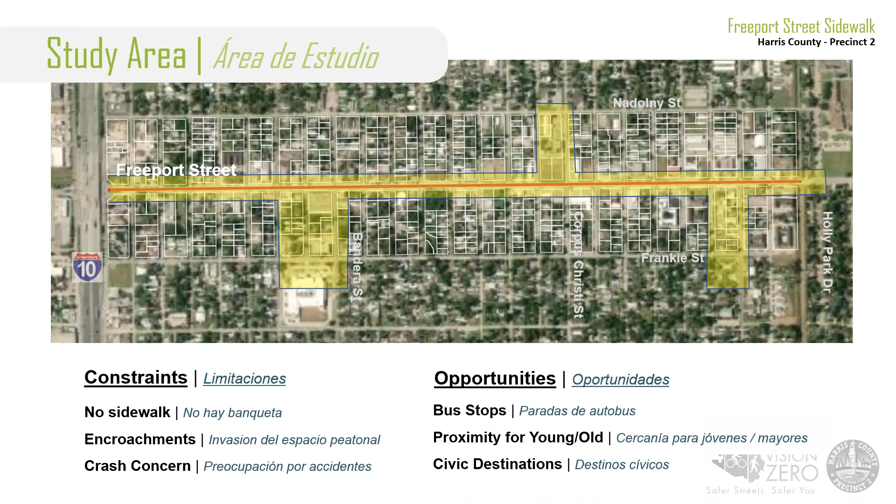First, areas with no sidewalk or incomplete sidewalks and no ramps for people with disabilities. It's first important to understand where there are currently not safe, all-weather surfaces for people to use and how we can connect spaces together to form a network. More people using the corridor and more active businesses comes from the community's success and leads to more activity. But we also need to provide the infrastructure to support that activity every day.

Here's one example of the project team walking the corridor in an example area without a sidewalk. Not only is there no sidewalk, but there is also standing water where people would be if it were dry. So even after a rain, it could be several days before someone brave enough is able to safely walk there. This is just one example, but there are many locations like it along the road, and we know residents have to deal with this every day.

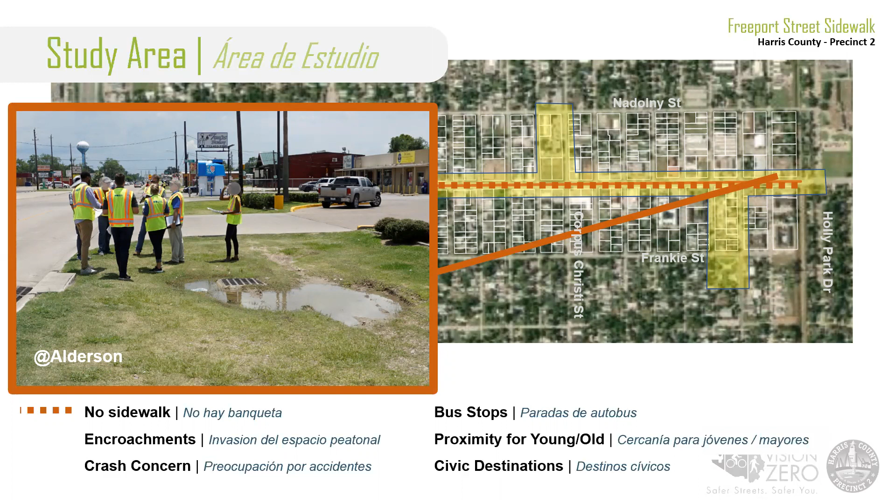We also refer to the places where grass has been worn down as people's choice trails, because that is evidence of the need for people using the corridor. We need to make sure that it is possible not just for the brave, but also for the everyday and the vulnerable users too. This is a pretty tempting place to build a sidewalk.

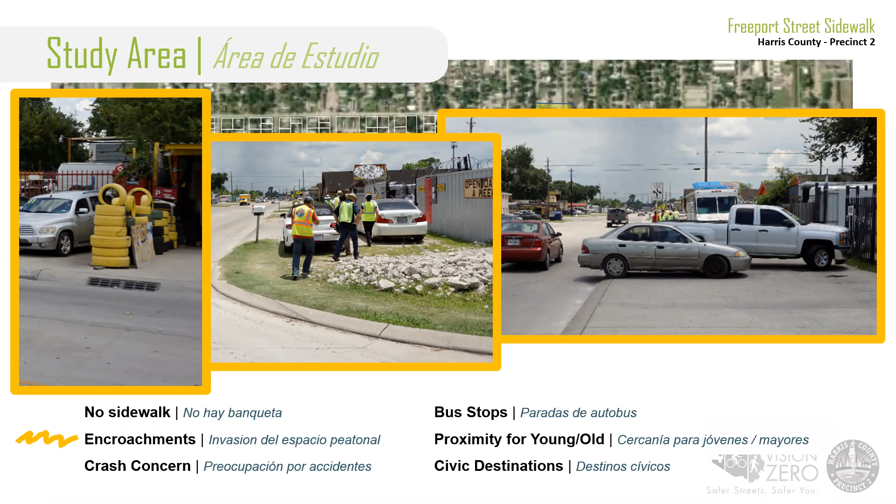I mentioned safety. This is a busy street, and unfortunately, it has also had a significant number of crashes. We pulled the data on crashes for the last 3 years and mapped it to look for patterns. We found approximately 150 crashes over the 3-year period. A number were major or ended in significant injuries, and unfortunately, 2 were fatal. It is very tragic and sad, but we can do better, so we want to learn from the experience.

Looking closer, there are a higher number of crashes and more severe crashes focused in certain areas highlighted on the screen. We are noting these as a cause for the need of improvement, and will also be looking closer at these locations for solutions. They could be adding signage, like a speed limit sign, marked crosswalks, improving visibility, and adding a safe designated space for all users.

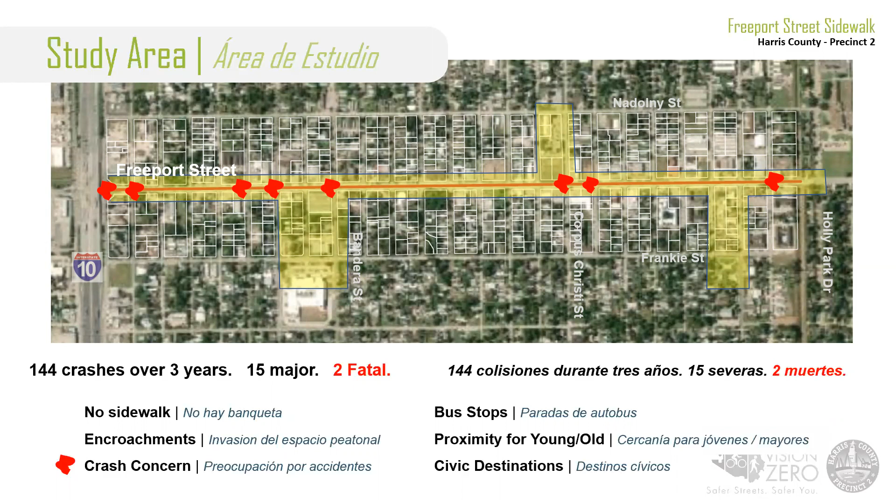There are not only constraints, but there are also opportunities. This street is alive with uses, businesses attracting people and people using them, parks and churches, schools and stores, food carts. These are the positives that make up the community. We want to enhance them, provide the infrastructure to support them, and make them safer and more comfortable to use and enjoy. We also have the opportunity to enhance the aesthetics of the corridor, to improve the quality of life for businesses and residences and all of the people who use the street.

Here's a picture, staff taking a break at the Rotary Park. See how the wall is providing delineation of space, but also a resting area? The surface is paved, so if it were wet, then they would not be in the mud.

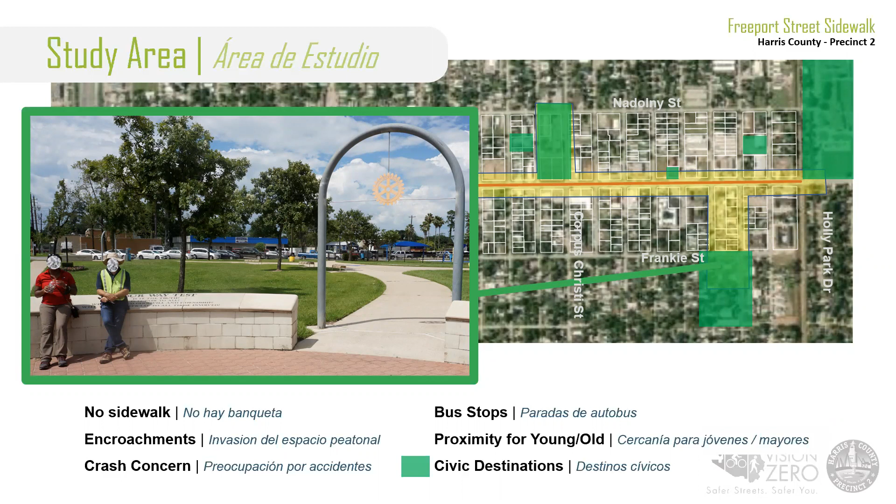Another opportunity, here is a mother with a stroller. There are places along the corridor next to civic activities that attract more vulnerable users - younger folks, older people with canes or pushing strollers, carrying bundles of laundry. We want to support their use, not just the quick and young to dodge between cars. This image shows 2 people, but it also shows an opportunity - the food truck at the right, and how they've made their own platform solution with crates as a creative solution for the mud.

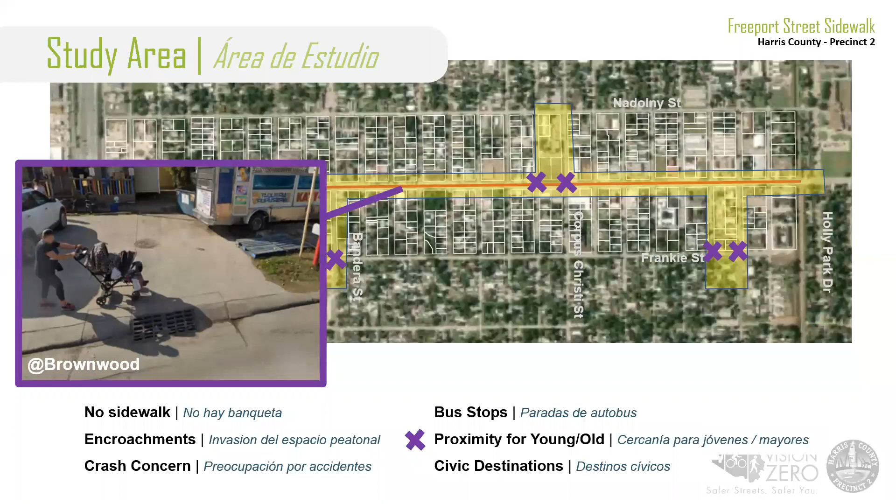And recently, there are now bus stops. In the last few years, more people in the corridor has led to more services. Harris County's transit has started the Cloverleaf line, Route 11, to facilitate people moving north and south, getting to work, school, and shopping, and, for example, crossing I-10 to get to the Walmart. Whether it is a hot day or rainy, this provides a critical transportation option. But the bus rider either needs to wait on the grass or in the street. And if you're in a wheelchair, neither is good.

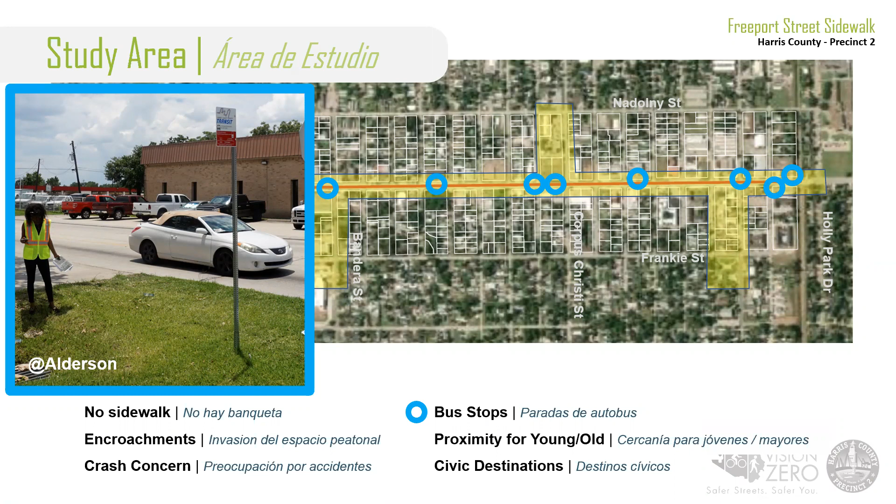So these are our 6 categories. We will continue to categorize what we learn and put into a document to help inform the solutions, where we need to do what and how. You can help us.

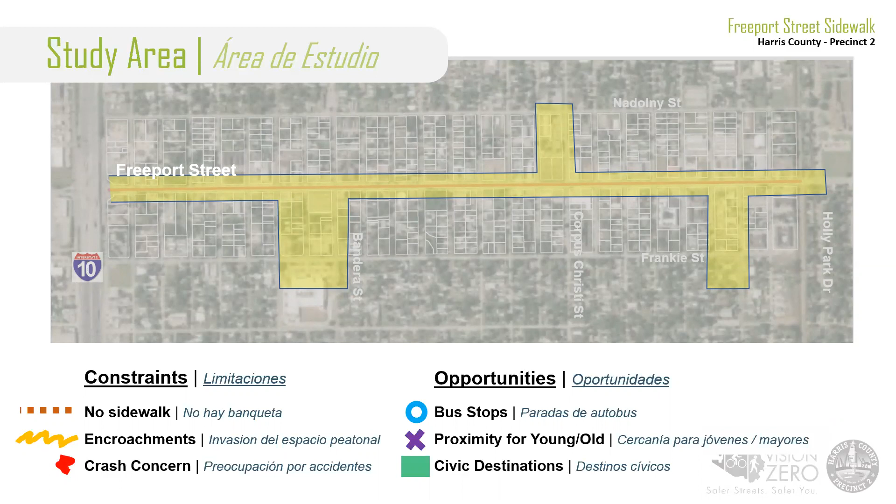We want you to be involved. We need you. You are the experts in the community using the street every day. So we have a survey out now asking what you think are issues and looking for input on ideas how to make it better.

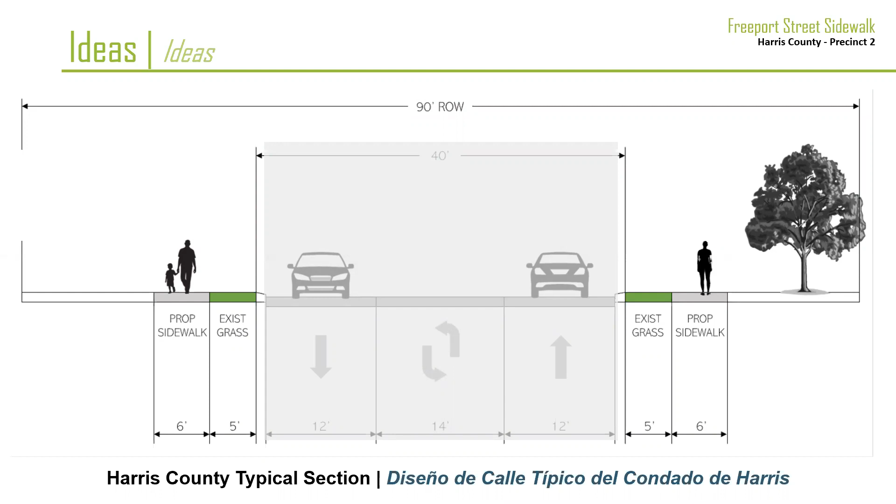So here we are in October. We mentioned the survey is already live and we are meeting on October 6th. We will close the survey on October 19th, and then we will update the study with results and design alternatives and bring back another public meeting with recommendations in December.